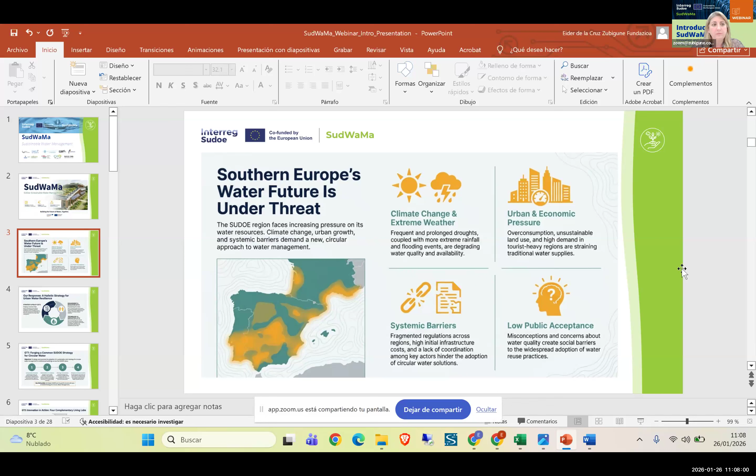The first pillar focuses on strategy and policy. The objective here is to develop a joint Sudoe strategy for circular water management, harmonizing regulations, public policy, and best practices across regions, which is important because we are working in the Sudoe territory. This work aims to support public authorities and decision makers in adopting coordinated and effective water management strategies. For the Sudoe program, this is one of the most important efforts, trying to implement this kind of strategy in the project.

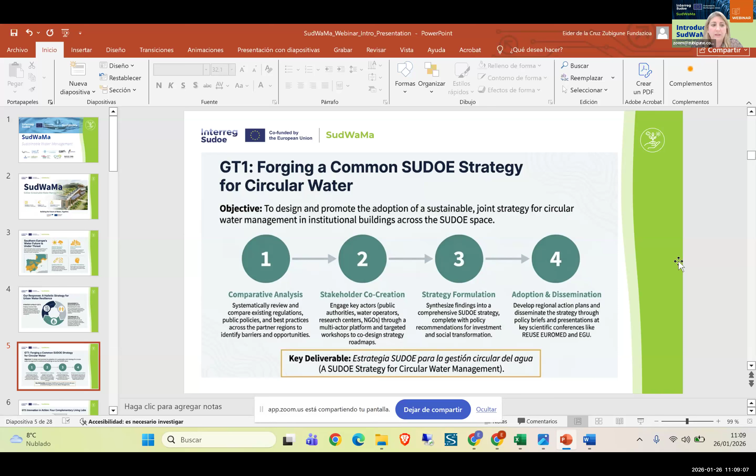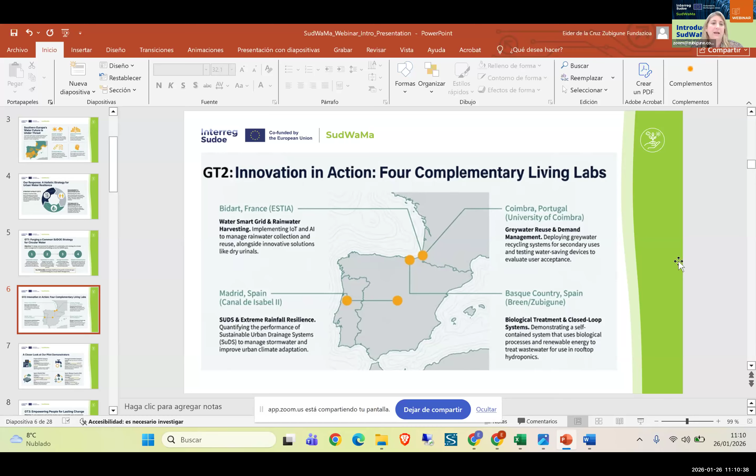So the idea is that each pilot works on different aspects, as we said, and afterwards there will be transnational topics that we can compare and apply after this analysis. So while we are working on these pilots, we will see what things are similar, different, what we can compare, and how we can work together on all this.

And the third pillar focuses on engagement and education. In that case, putting people at the center, SudWaMa places people at the center of the transition towards sustainable water management through water living labs, digital training modules, public awareness campaigns, and citizen science initiatives. The project empowers users, professionals, and institutions to participate in water saving practices and long-term behavioral change. So we think this is a very important aspect of our project as well.

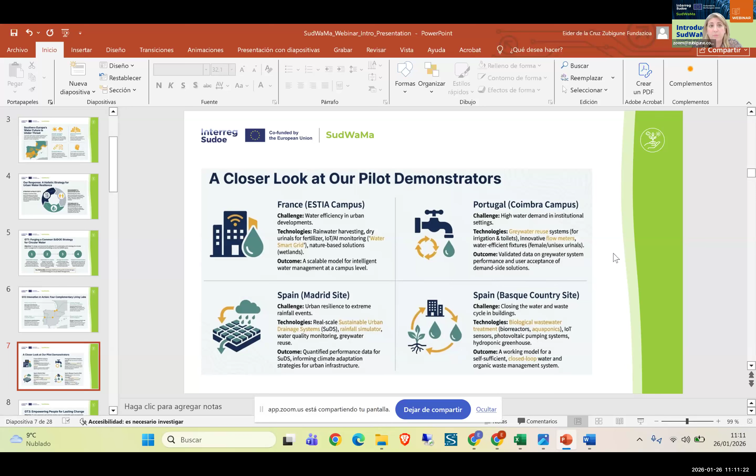SudWaMa is not only about testing solutions, but also about creating impact with this project. The project aims to deliver a replicable and scalable model that integrates technology, policy, and public engagement. Its legacy includes a joint Sudoe strategy for circular water management, validated pilot solutions, and strengthened institutional capacity to implement sustainable practices beyond the project's lifetime. I think that's maybe the more difficult aspect, but we will work on that.

Today's webinar is part of SudWaMa's dissemination and engagement activities, and it provides a platform to share innovative technological solutions and high-impact public strategies, and to foster dialogue between experts, institutions, and practitioners working in the field of water management. For the moment, with this introduction, I think this is enough information about the SudWaMa project. If you need more information, you can ask us or get in contact with us.

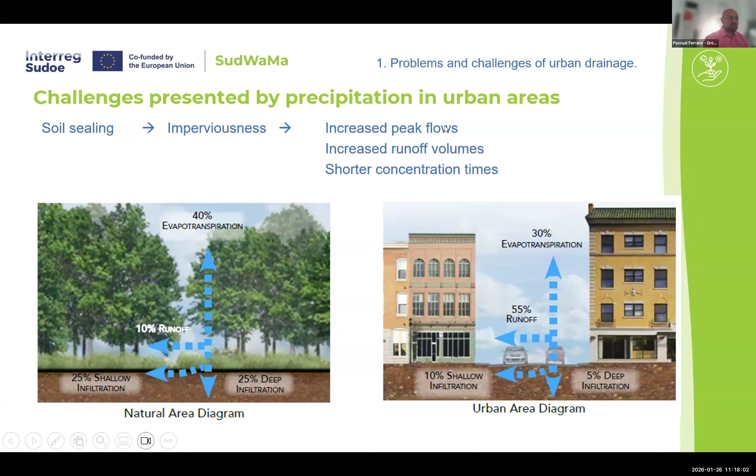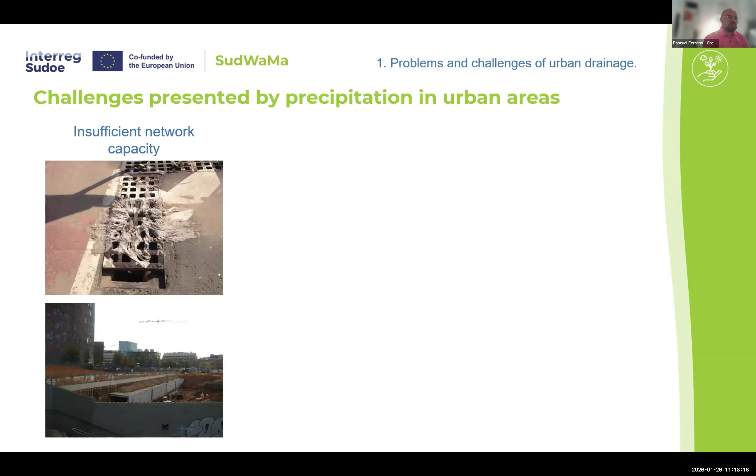So these are just some examples of the challenges that may bring to water management in urban areas. We can have insufficient network capacity, and in the long term this will make the network insufficient, and we will have to make it bigger.

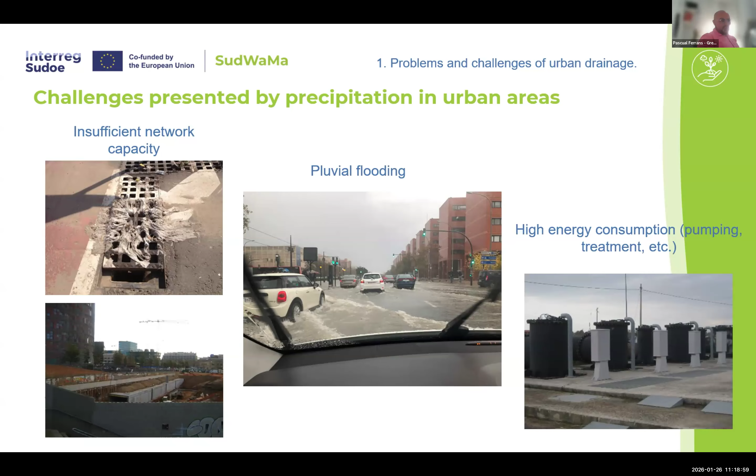Pluvial flooding, and every time more and more, these kind of pictures are more recurrent, due to different climate change scenarios that we can talk about a little bit more later in the presentation. This will also mean high energy consumption for pumping and treatment, and this of course will also mean high budgets for treating the water.

If we don't treat the water right in urban areas, I would like to make a quick example of, depending on how we treat water, how the sewer system works in our city, the impacts that urbanization may have.

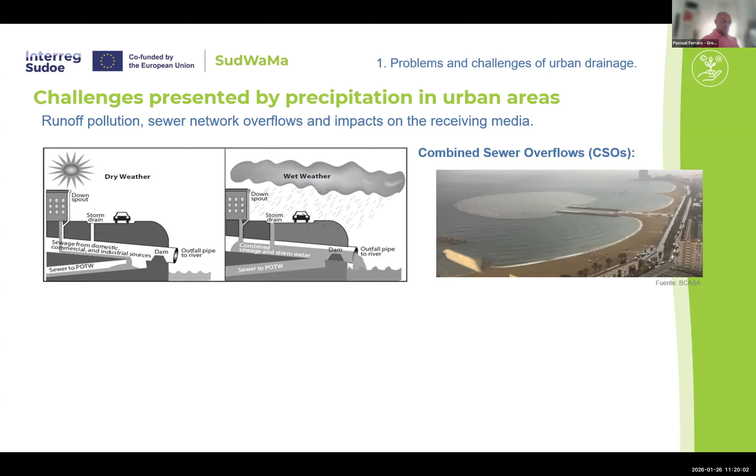In this first example, which is a combined sewer system, we can see on the left that in dry weather, what should happen is that the sewer, the pluvial and residual water from buildings, mainly gray and black water, will go to the treatment plant, and it shouldn't have much problem. The problem comes when we have wet weather. Our network doesn't have enough capacity to treat all the water, and this will generate what in the field is known as combined sewer overflow, CSOs, which may have big environmental consequences on the rivers, sea, and in general on the receiving water body.

And what happens if we have a separate storm sewer system? This is kind of different. Here on the right, you can see what happens when we're in dry weather, when there is no rain. What should happen is that all the residual water that comes from buildings and from human activities in general should go to the water treatment plants. But what happens when we have wet weather is that most of the water will go directly to the river or to the water body that is receiving water.

You may think that rainwater is not polluted, but this is definitely not right. On the right hand side you can see this is from an experiment that we performed in GVM, from an event in an urban area, and just by the color you can see how polluted rainwater may be. So this is also a big problem for the receiving media and water bodies.

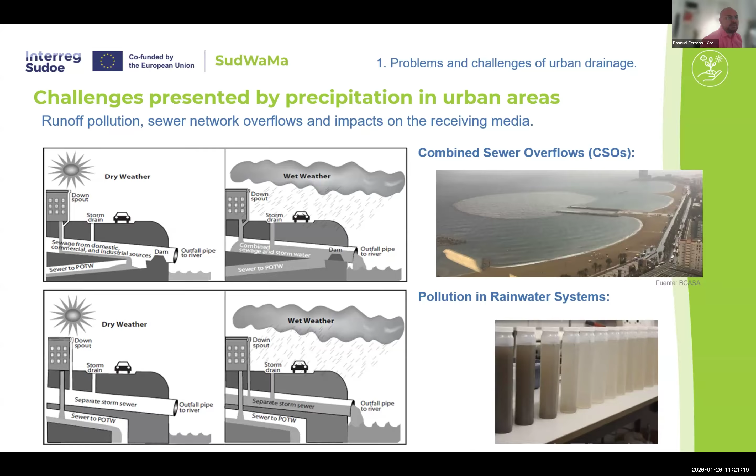Just some examples of some other challenges that rainwater may bring in cities. You can see here on the left some risks and some areas that should be used by citizens, like green areas. You can see a lot of erosion here, and here you can also see some floodings that mean the green areas that are supposed to be usable are not.

I want you to see this image because later on we'll see some comparison of how we believe this should be changed. We will also have a limited space for vegetation, and you can also see here how we can have safety risks for citizens, not only because of the flooding, but because of some uneven surfaces that may bring unsafety for citizens.

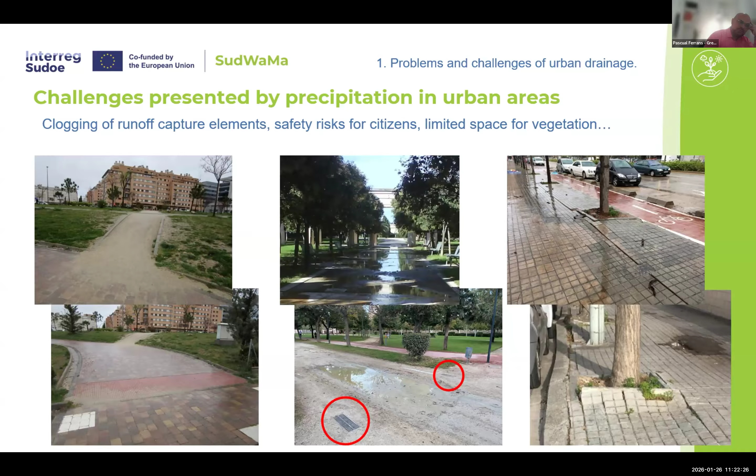Having this in mind, I would like to introduce now some of the concepts that we work on in GVM, which in the long term is called sponge cities, and how it should be accompanied by a paradigm shift in how we treat water in cities.

What we propose, what we think should happen, is that we should move forward to smart water sensitive cities, or sponge cities. I like this term because it's quite understandable that what we want to do is to absorb and use the water that comes into the city. The idea behind these concepts is that we mimic natural processes to deliver benefits without harming the environment. There are different pillars that integrate this idea, but in the long term, what we want to do is integrate urban development with water management.

Some of the ideas we want to change or introduce with this concept is that we treat cities as water supply catchments, to see water as a resource we can use and not as waste that we have to evacuate as quickly as possible, which is how I think it's done in most cities right now. Also, because of the green areas, we believe the city can provide ecosystem services and increase livability for the citizens, so you will have some added value with these solutions. And it's very important that cities have engaged communities and committed institutions to have this change of paradigm in how we treat water in cities.

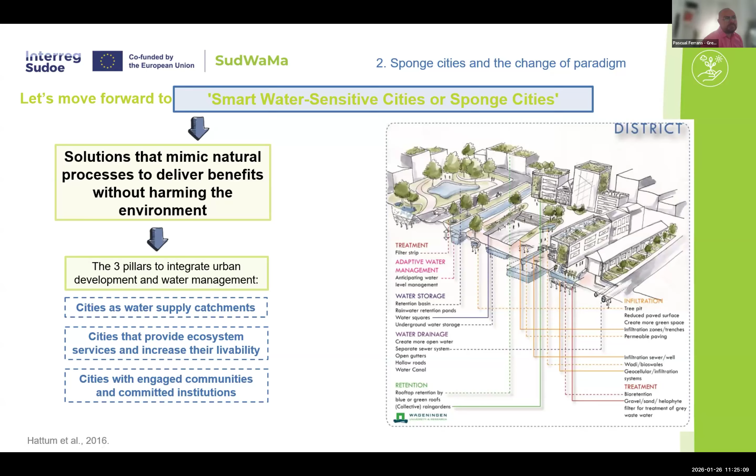So in order to change this paradigm, what we believe is a great and very powerful tool to do this is our SUDS, which is the acronym for Sustainable Urban Drainage Systems.

Usually what you may think is that SUDS have, of course, one of the main pillars being quantity - how these structures can manage the quantity and runoff production in terms of volumes and flows. But there are three other pillars equally important: these structures can also give us management of runoff pollution and water quality, and they create and maintain better urban environments, and enhance better natural environments in accordance with urban environments, having a mixture of both. So these are the four pillars we use to design these structures, and each is as important as the other.

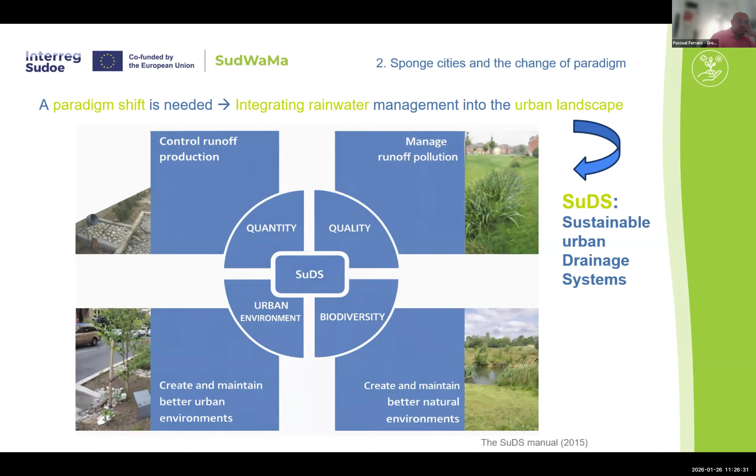There are different definitions of SUDS. Also there are different ways of calling it depending on the place in the world. They can be called low impact development, or other acronyms, but at the end we're talking about the same structures, or not the structures, but the idea of how to treat water.

So one of the definitions is that SUDS are an innovative stormwater management and urban planning strategy - and this is very important, the urban planning strategy - aimed at replicating and restoring pre-development hydrological processes. You remember the first diagram that we saw. The idea behind this is that they strategically integrate runoff control measures with urban landscapes.

So this is just one example. If you see this, you may believe that okay, this is a nice street - they have gardens, flowers, green areas. But what if these green areas also help us treat stormwater in a smart way in the city? So this is the idea behind it.

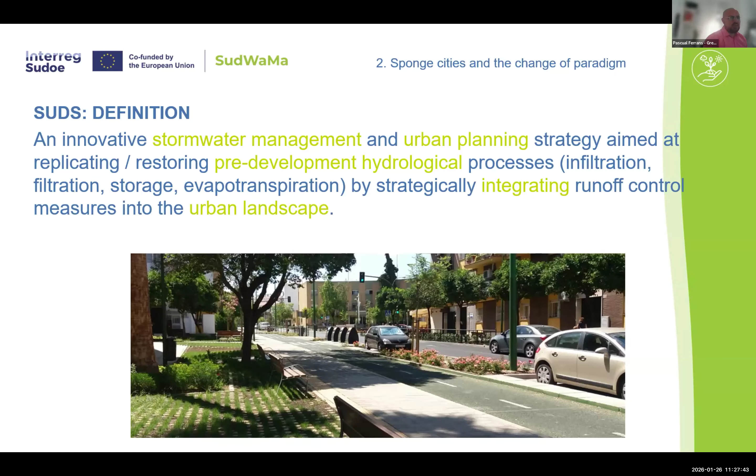So some key ideas about SUDS philosophy and how this works: we're aiming to protect existing water bodies by treating the quality of the runoff. We want to preserve natural drainage patterns - we're talking about pre-development hydrological conditions. We want to minimize and disconnect impervious surfaces. We will see some examples on how we can manage and achieve this.

This is also very important, and I think in terms of the project in general, one of the main potentials that SUDS have is that they consider rainwater harvesting and reuse strategies in order to have the circular economy concept. So that's another key goal of SUDS - we can see how they help us bring rainwater management to the source. We will see some examples later on.

And the key idea of these structures - we will see some examples in the next slide - but I want you to keep in mind that what we aim to do is have management trains with different interconnected structures, not just one structure. This potential will have higher impacts on the treatment that we do.

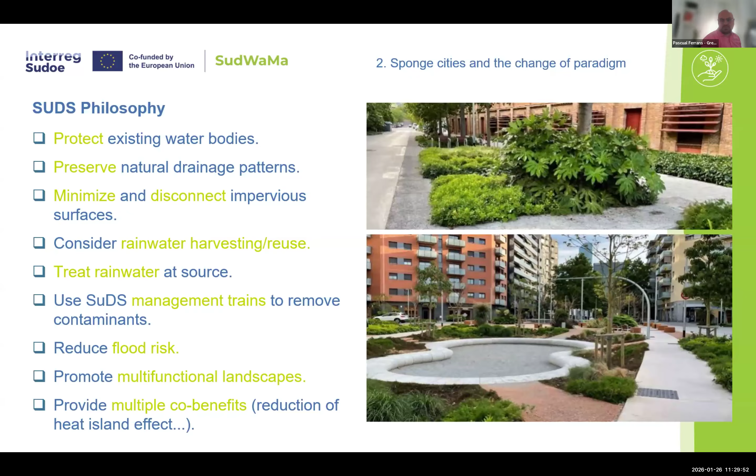Of course, we are aiming to reduce flood risk and have multifunctional landscapes with different purposes and multiple co-benefits. I don't want to go too deep into this concept, but just to mention some of them - the heat island effect, which is basically increased temperature in cities due to impervious areas, and these kinds of strategies will help us mitigate this kind of negative effect, not only on water but in different holistic areas.

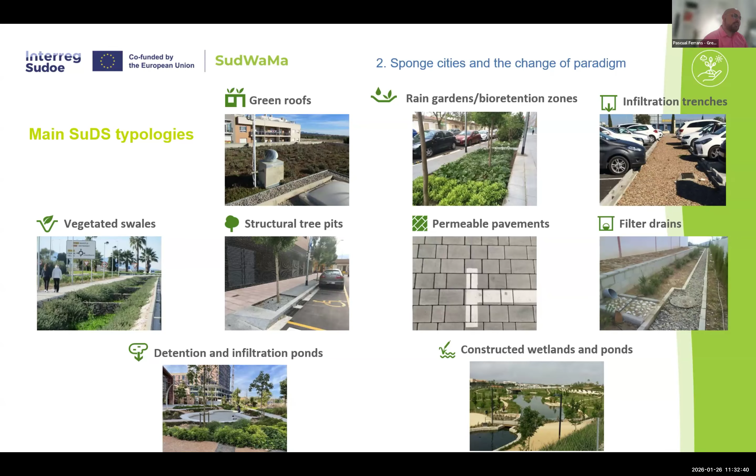As important as these are, there is also another concept. This kind of event that we are in right now is also very important, because as important as structural measures are, there are also non-structural measures such as educational programs, citizens' participation, and dissemination of experiences like this one right now. Legislation on planning, appropriate design, and also a very key factor in this kind of project, which is maintenance and prevention practices. So the idea is that not only building structures is necessary to achieve sustainable water management in cities, but these measures are also very necessary and included within the concept and definition of SUDs.

At the end, this is all included within a greater and bigger concept, which is nature-based solutions. So we're talking about actions to protect, sustainably manage, and restore natural or modified ecosystems. And this is also very important: we're also addressing social challenges and providing human well-being and biodiversity benefits.

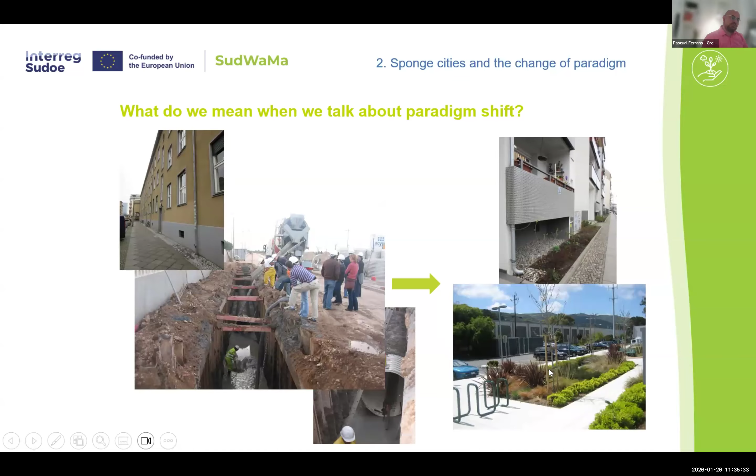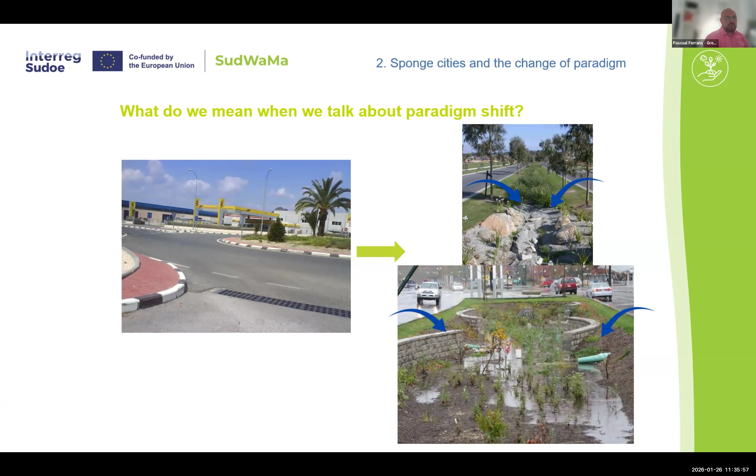Or what happens if we stop addressing problems with gray solutions, with underground big pipelines, and start to enhance superficial structures to treat water? We just finished last year a very nice project about a SUDs actuation in Catalonia, which was based on a roundabout. So what happens if we stop having these high roundabouts and start depressing the structures to have structures that treat water efficiently?

Or what happens—and this is also an example of big-scale structures we may have—if we stop having these big rain harvest deposits and start using superficial structures instead, which will also provide nice green areas for citizens to take advantage of? These structures are designed to be dry most of the time. So why don't we change this idea of how we treat water, using green superficial structures instead?

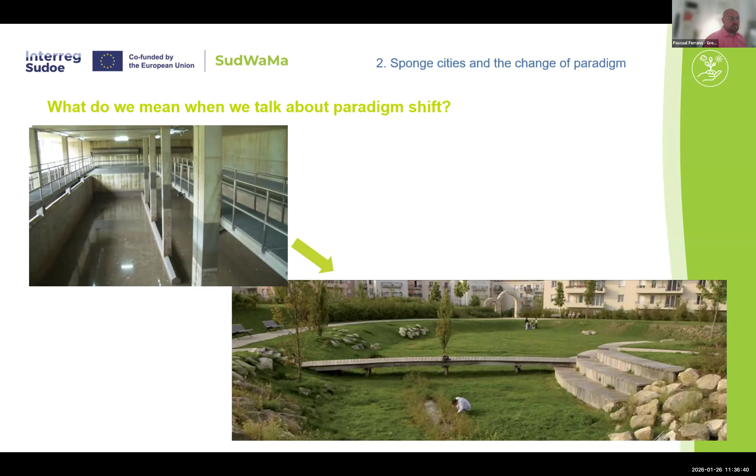This is also another key aspect. Normally how these projects work is that we have some budget and the water utilities company takes the decisions. But what we are talking about with this change of paradigm is: what happens if the university and academia are involved? What happens if green spaces are involved? What happens if energy, or even the community—which is also very important—is involved? We change how water projects are usually managed, and we start treating projects in a holistic way where different stakeholders are involved.

Okay, just the last aspect of the presentation, I wanted to make some success stories. So I want to start by giving you an idea with some success stories in Washington D.C.

This is in the United States of America, which is one of the countries that has been implementing these kinds of technologies, also probably the UK, Australia, and China. But I wanted to bring this as the first example of these structures, so you may see how they receive water from the roads and from different depressed green areas.

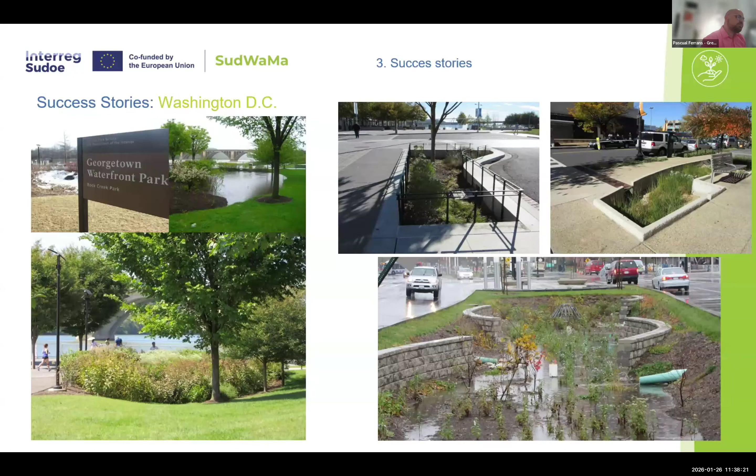But what I wanted to do is this. Usually you may think that this is some technology that is not used, at least in Spain right now, but that is not true. We have had some experience implementing this kind of project in Spain.

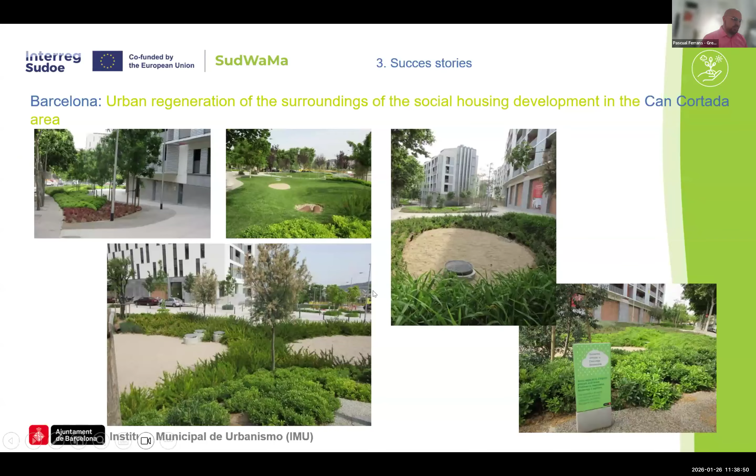So these are some examples, for example this is in Barcelona, in a social housing development. So we designed a holistic strategy to treat water with different green structures. This is the project, well conceived and finished.

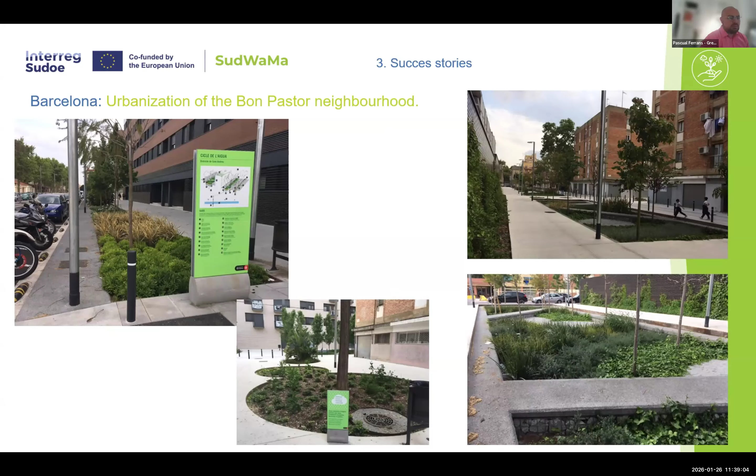Also in Barcelona, for treating water from different roads in the neighborhood of Bon Pastor. This is another good example of how these projects have been implemented in Spain.

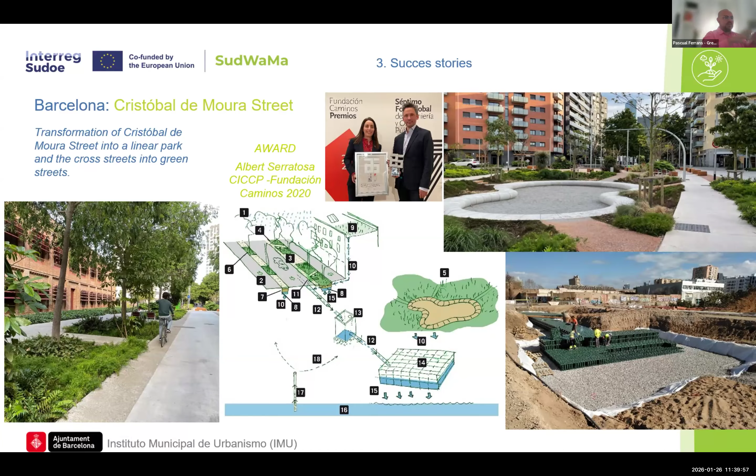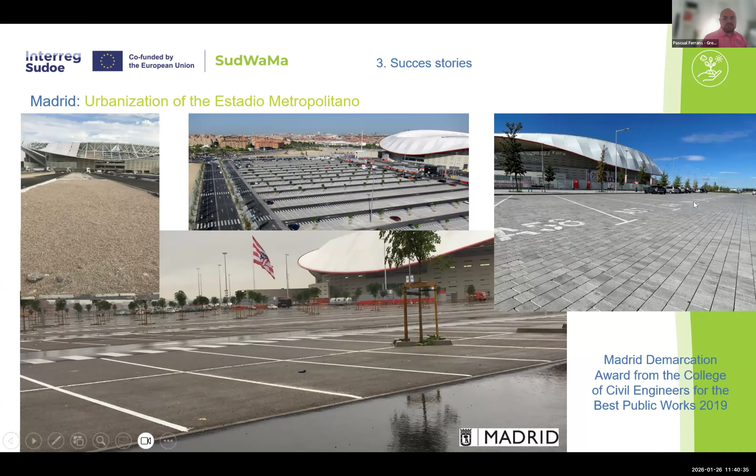Which was the installation of several hundreds of square meters of permeable pavement, which you can see here. If one day you have the opportunity to go to this stadium, you may see that this is already implemented and it's been working quite well for some time already.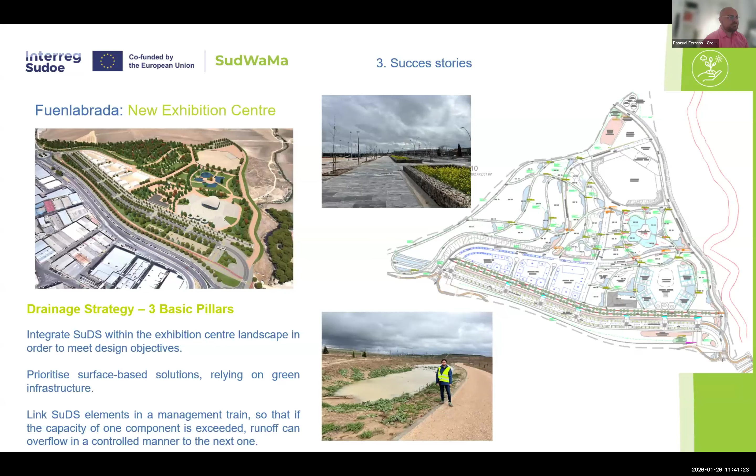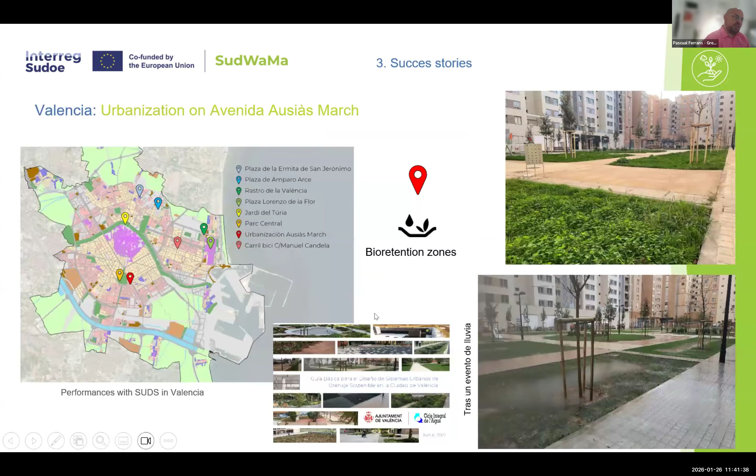And this is another example, in Valencia, where we are based, with different typologies and also with non-structural measures, which is the one you can see here, the guide for designing SUDs for Valencia. And this is also another example of how non-structural measures are important.

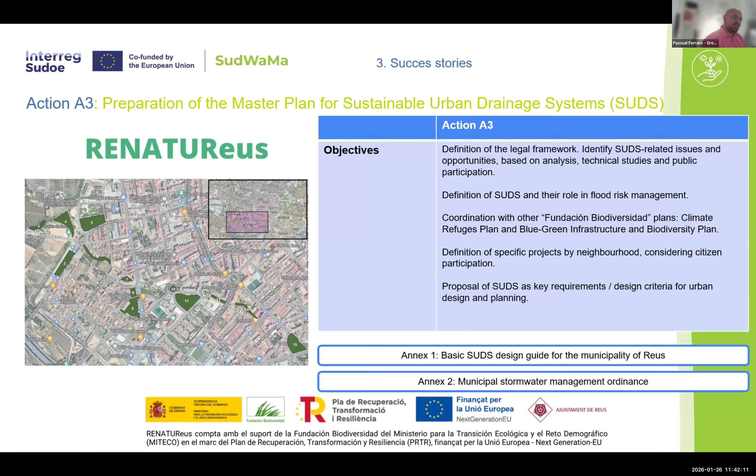We have also worked in Reus, not only on the roundabout project I told you about, but also on the preparation of the master plan for sustainable urban drainage systems, which is the step-by-step guide on how SUDs may be implemented and enhanced in the whole municipal area of Reus in Catalonia.

We did something similar in Pamplona. I don't know if I have some other examples. No, these two examples I wanted to bring just to give you some ideas on how the non-structural measures are also very important in implementing these kinds of structures.

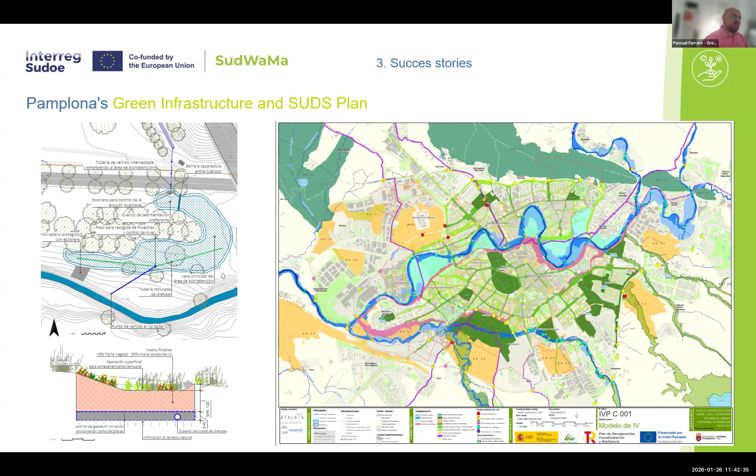So that was all. Just final thoughts about the presentation and how it should be conceived. SUDs can be implemented in a wide range of projects, and they are already well established in Spain. They should be addressed from a multidisciplinary and multi-criteria perspective, and this is very important for you to implement in a straightforward way.

It should be considered in the early stages of different projects, from planning and design. It's very important to have local design guidelines and the non-structural measures I was telling you about, to standardize the design of these kinds of structures.

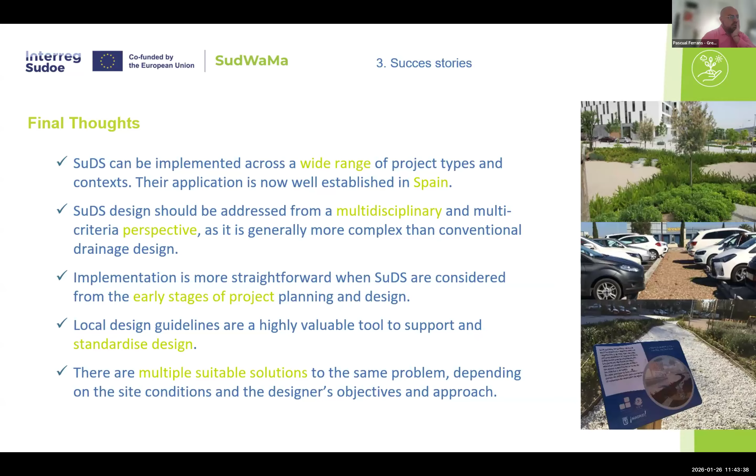And there are always multiple solutions even for the same problem. So the idea is to analyze each problem in a holistic way with different stakeholders, and to be able to address it in the most sustainable and efficient way. So I think that was all for me. Thank you very much for your attention.

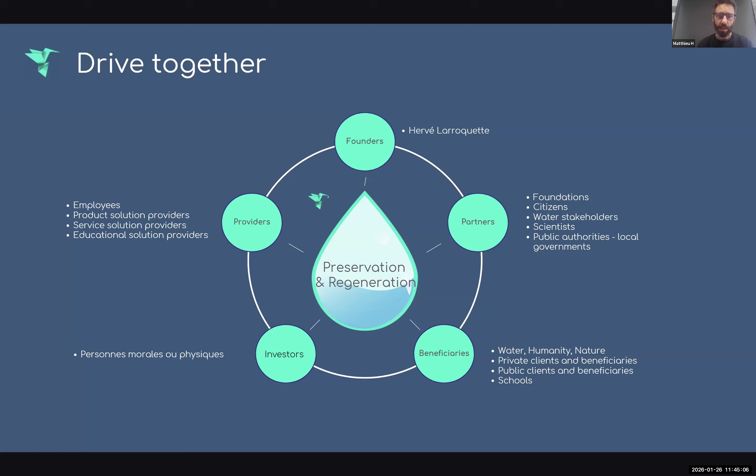Copo is a specific company as we are driven by purpose. Our purpose is to preserve our water, our communal water, and we are doing it by cooperation. How it works: first of all, we have five groups that together drive our communal company, and we do it by activating three levers.

The first lever is to propose the best water solutions. The second lever is to co-design and innovate, and the third lever is to bring together the voice of the water.

Briefly, I would like to show you some of the solutions we have as partners. They are in three categories. The first one is pedagogy, and we work with the Water Family, which is a French NGO, and Sator, which is a startup. Both of them help us propose pedagogy for children, for adults, from the operator and technician to the main leader and politicians. We have solutions in-person or digitally.

The second kind of solutions are services. One of our main partners is Arkiturria, a technical studying desk able to work as an architect to calculate and design the main solution for a hydro-performance building. The second one is L'Échappée Verte, which designs the fields and ground to generate and catch water.

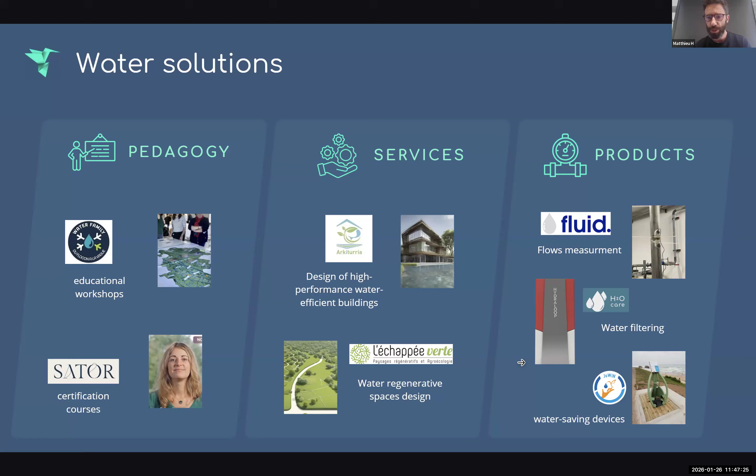The third group is what we call product or technical solutions. Fluidion is a solution of non-intrusive measurement to measure liquid flows. H2O Care and Hydroloop is a solution to catch gray waters and filter them to put them back, for example, into toilets or washing machines. And Juin is a technical solution that offers water preservation by using less water when washing your feet at the beach.

So just note that we aggregate several kinds of solutions, but I have a question for you: according to you, what is the very first step to preserve water? I'll let you a couple of seconds to think about this simple question. Not consuming it - for sure, that's a good solution. But I've got for you another solution, another way to think.

For us, the very first step to preserve water is mastering our understanding of water usages: who consumes what, for which uses, in what proportions, with what impact, on which territories, in what water context, and so on.

Lord Kelvin used to say we will manage only what we measure. But to be honest, today we work with a lot of data that is measured with many solutions in many frameworks. So this data is unclear, maybe not up to date, and not comparable. It's a real difficulty today to properly address water issues.

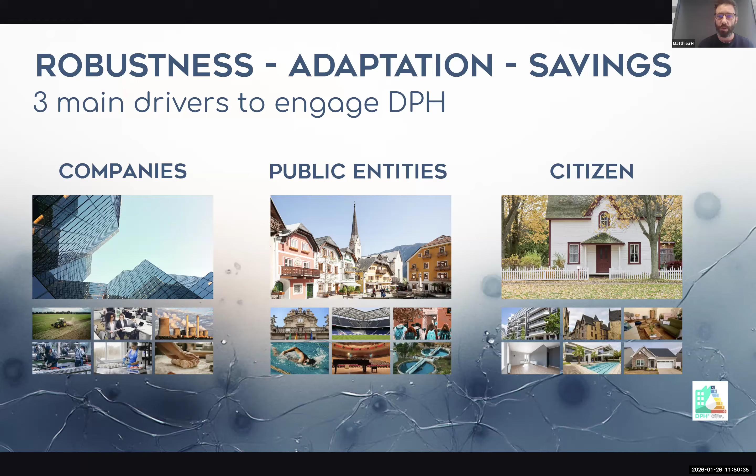We target everybody: companies, public entities, and citizens. For all of them, one issue is the budget of water. For companies, the main interest is to improve their robustness - any economic model is linked to water issues, price and availability - so we work with companies to improve their robustness to face these issues. For public entities, the topic is climate adaptation and service continuity, so we work with them to fix these issues.

How does it work? What are the main promises of the DPH? First, it offers a readable and comparable water score from A to G, so for a child, a grandmother, a grandfather, it's easy, thanks to our reports, to understand if a building is hydro-performant or not. The second big promise is to propose top priorities for the best action plan, and we target up to 40% of water saved for each DPH.

As a cooperative company, we have another promise: we would like to offer our data to politicians and public authorities.

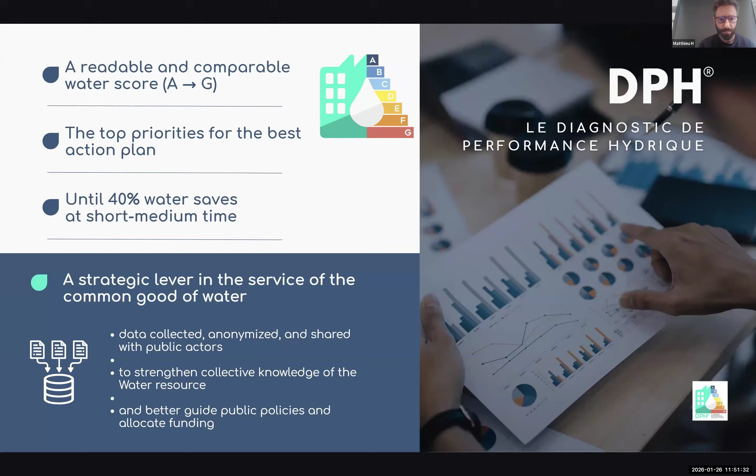How does it work? We have a global score from A to G, but this global score is calculated on 5 indexes. First of all, the quantitative index.

We are looking at the flows that are engaged in the field, in the building, and in each of their usages. What are the incoming flows, what are the volumes, and the quantity control processes. This index has its own notes, its own score.

Then we are looking at the qualitative index. We are looking at the outgoing flows of the field, the building, and the machines or devices, and whether in those flows we have some chemical or organic inputs, filters, and recycling technology and flows.

The third index is about the equipment and the usages. I always take the same example: in your shower, you can have a performance device to reduce the quantity of water you use. But if you stay 8, 10, or 12 minutes in your shower, even if your device is good, you have bad usage. So we are always looking at the device and the usage.

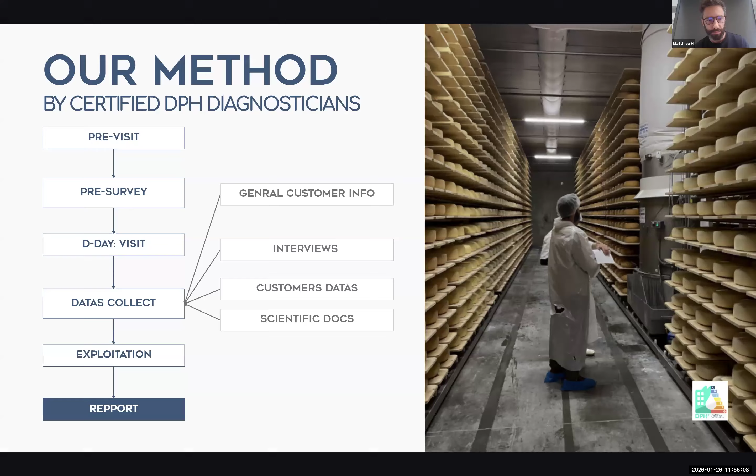Day by day, how it works: we do a pre-visit, especially if the building has a complex process. We send a pre-survey to our customer to collect a lot of data. We realize our audit. On the D-Day, we are always 2 expert engineers, hydrobiologists, and so on. We measure, we collect data, and we drive interviews with operators, technicians, and so on. Then we push all this data within our own algorithm and tools to create our report.

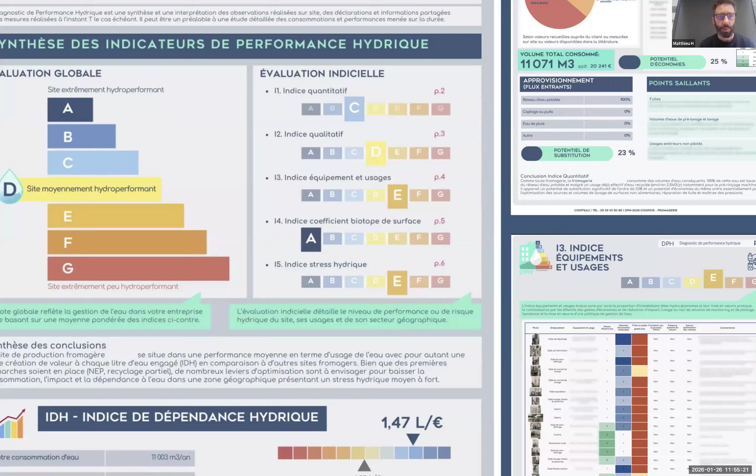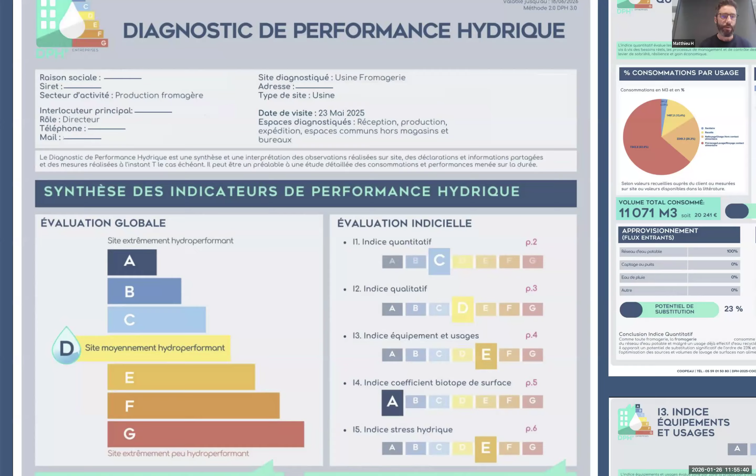This is an overview of one of our reports. This is the very first page. Maybe I can zoom in for you. As you can see, it's really easy to read and clear for everybody, because our target is not to deliver something complex for just some engineers. We would like to propose this kind of diagnostic to everybody, so it has to be very clear and simple to understand, to accelerate water preservation.

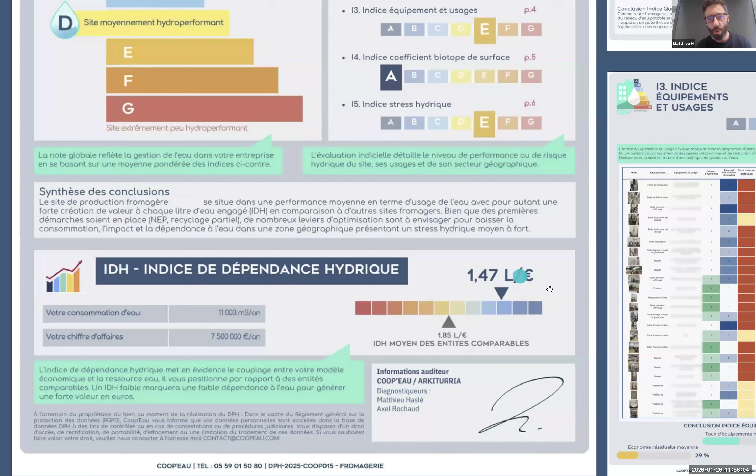So on the very first page, you have your global score, the 5 scores for the 5 indexes, our main conclusions, and an additional index that summarizes how many liters of water are engaged per €1 of turnover. We compare it to competitors, so the company can easily understand if they use more water than their competitors for the same euro.

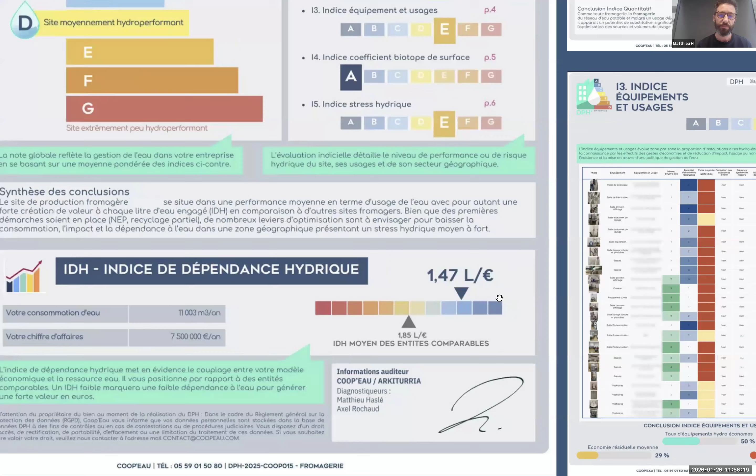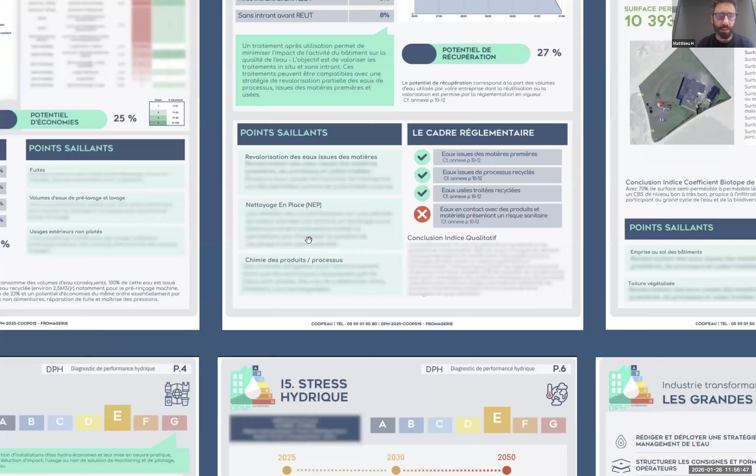Then you have 1 page per index: quantitative, qualitative, and so on. You can see the main figures about the water used by the customer - excuse me, this is in French - how far they can reduce their usage of water, what kind of recycling they can do, and so on. You can see the main points of their process, what can be improved, what is already well done by the company, and each time there is a conclusion for the index.

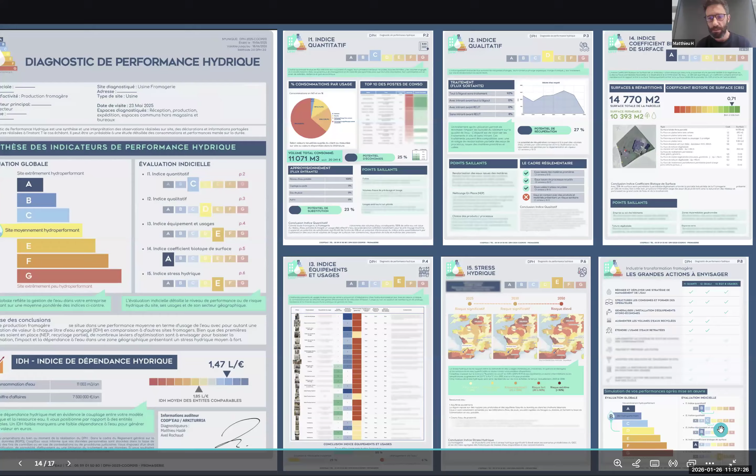So you can see here, as another view, the 5 indexes. We have theoretically 1 page with our conclusion, and on the bottom right you have a first macro action plan to drive our customer toward improvement. And there is a projection here, a simulation: if they put these actions in place, their score can go from one level to another.

So this is, let's say, the basic pack for the DPH, which has to be done within a constrained timing and a constrained budget. I insist on this again - our proposal is to let people access this kind of diagnostic.

We have some additional propositions. We can propose a detailed action plan - we work on maybe 30 or 40 action plans or actions usually that we propose to our customer, and they can participate with us to define the main action plans they want to put in front of our diagnostic.

We can propose to put some measurement devices in place. We can propose to go on technical feasibility studies. We are able to support them with on-site implementation, with the establishment of a water strategy, and with funding research.

What you have to understand is that we don't want to do all the diagnostic by ourselves. We are a small team, and as our target is to make this kind of diagnostic accessible to anybody, we are working as a network, and we are training some people out of our company to become diagnostic assessors.

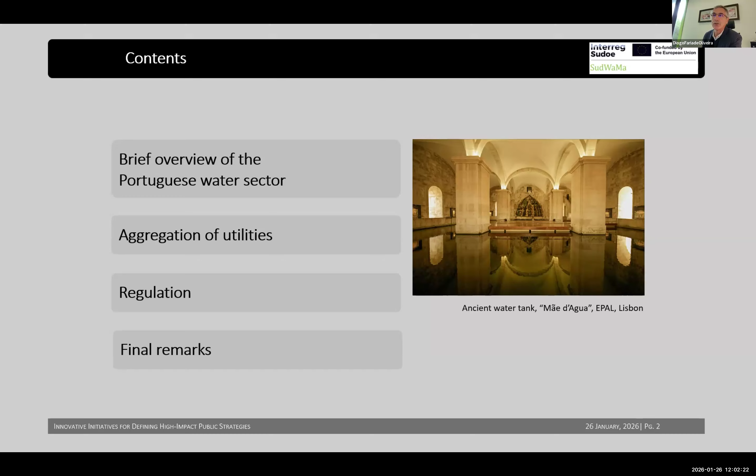Okay, I believe you are seeing the presentation. So this presentation is a little bit different, as innovative initiatives take long, they take a generation. So although we are calling it innovative, it is still high impact public strategies for the Portuguese water sector. We will briefly go through the Portuguese water sector, then talk about aggregation of utilities, regulation, and final remarks.

As you probably know, we entered the European Union in 1986. For the cohesion of social and economic standards to the average EU country, the European Union started supporting some sectors here in Portugal, such as transports and water and sanitation. So lots of grants were coming from the EU for us to build wastewater treatment plants, extend the network, and so on.

But here in Portugal, municipalities had the responsibility of doing it. So each municipality had its own priorities. Some did wastewater treatment plants, others extended the network, and so on. And our indicators were really poor. For example, in wastewater treatment we had only 28% coverage here in Portugal.

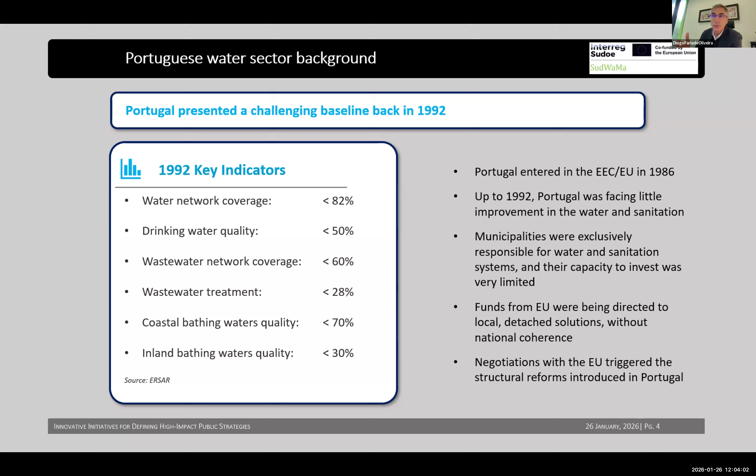What happened is that because municipalities were choosing their own investments, many wastewater treatment plants never even worked in their life, either because they were badly designed and constructed, or because there were no sewage connections, or just because the municipalities couldn't operate them. So the EU told us that we had to do some reforms, otherwise they would not put more grants into Portugal. This triggered the reforms that we had to undertake in this country.

These reforms started in 1993, and we made changes in laws. We did aggregation of utilities, restructured the tariffs, and rethought the sustainability of our water supply and sanitation. So in the laws, we made only small changes, but these changes were key to changing the entire sector.

One of the changes was to enable the central government to partner with the municipalities. Although this is a municipal responsibility, the government could do these partnerships with the municipalities, 100% public, but with the government participating with 51% in these partnerships, and the municipalities the other 49%. The second change was about private sector participation.

Here in Portugal, privatizing water and sanitation is absolutely forbidden. But there was this little change in the law that said that the private sector could enter into concessions with the municipality. So these two minor articles made all the difference for the changes here in Portugal.

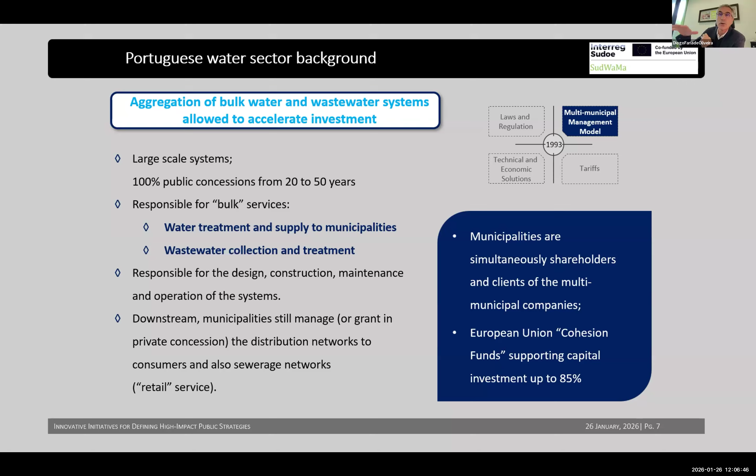They formed this public company, and this removed the responsibility of the municipalities for doing water and wastewater treatment plants. Downstream, at the distribution systems, which we call retail systems, municipalities could still choose to either do it alone or do it with the private sector.

In terms of tariff, we have full cost recovery in theory, and I'm going to explain it better. Tariffs include the bulk water tariff, what customers pay to these bulk water companies, these multi-municipal companies, and it includes the retail operation tariff, the price that municipalities retain for themselves to pay for water distribution.

Here in Portugal, tariffs are affordable everywhere. We pay in total for water and sanitation 2.32 euros per cubic meter. And still, if vulnerable groups, low-income families, and families that need support exist, they can go to a scheme of social tariffs. Municipalities can apply them or not, it's voluntary on their side, and we have social tariffs in 77% of the municipalities here in Portugal.

Then we made some changes in the technical solutions as well. We decided at the time to save groundwater for emergency and water scarcity periods, and we decided to make all water supply and sanitation from surface water.

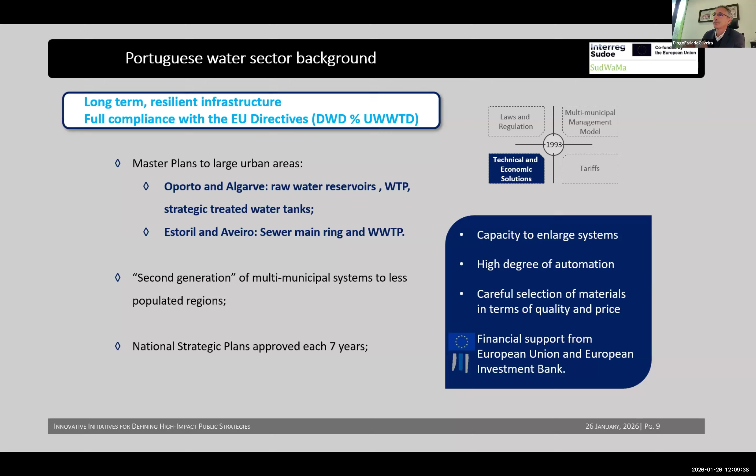So we started in large urban areas to have high impact, because that's where the population was centered. Then when we finished Porto, Algarve, and Lisbon, we went to the remaining country. So these were the reforms we were performing.

Also, along with the reforms, we have done national strategy plans for water and sanitation every 7 years, which we presented to the European Union. We explain what we have done in the previous 7 years and what we want to do in the next 7 years, and we agree with the EU and financial partners on what we need for the next 7 years.

So they were focused on different aspects. The first one focused on urban areas, the first multi-municipal systems. The second, between 2007 and 2013, focused on the second generation multi-municipal systems. The third focused on efficiency, and now we have a fourth one where we also include rainwater management. These plans are very important to align stakeholders on one hand and to attract funding for the country on the other, both from the EU, the European Investment Bank, and other financial partners.

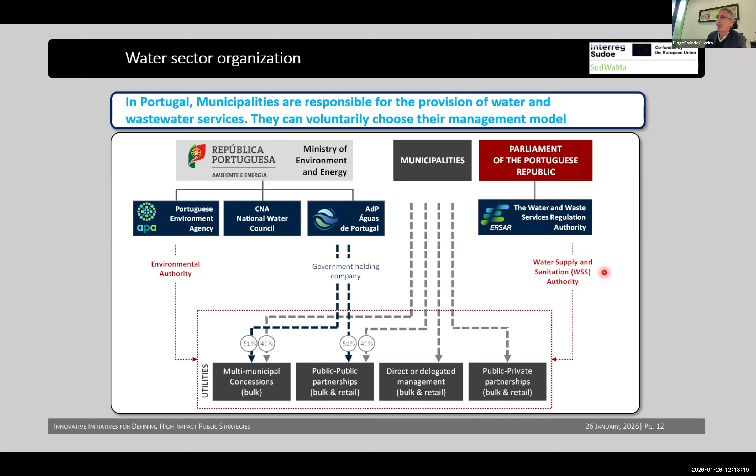This said, I'm going to go a little deeper on aggregation of utilities. As I told you, there is this government-owned company called Águas de Portugal. It owns 100% of EPAL, the company that distributes water in Lisbon and runs the bulk systems for the metropolitan area of Lisbon. Then they have these 12 multi-municipal systems throughout the country where they participate with 51% of the shares and the municipalities with the remaining 49%.

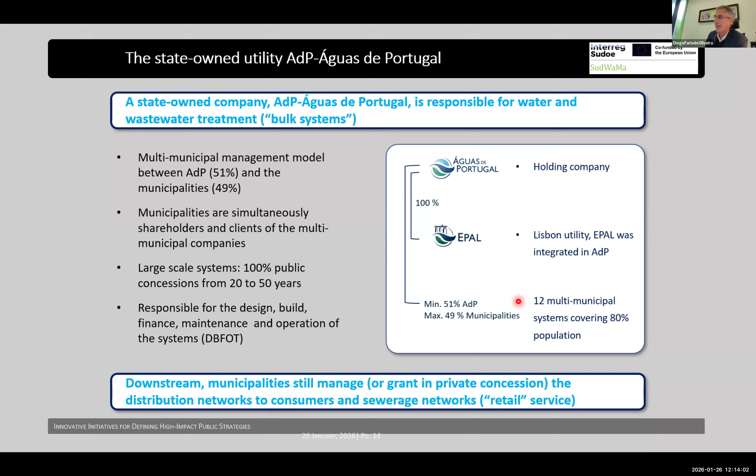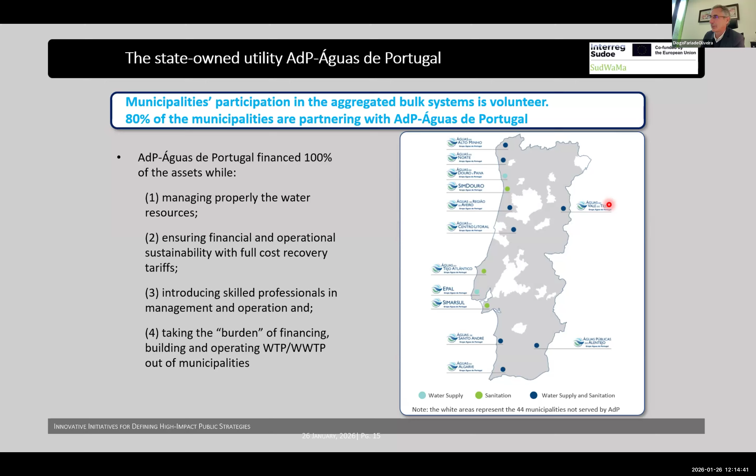It has some holes in it, and these holes represent the municipalities that are not partnering with Águas de Portugal.

On the distribution systems, the retail systems, there were also some aggregation, but very few: one in 1997, then one in 2009, one in 2015. All of a sudden, many municipalities start to aggregate their systems. Why? Because the government put a financial incentive for aggregation, giving grants to municipalities that aggregated their systems to gain regional scale. This is very recent, and it was possible through this incentive scheme made available for the municipalities.

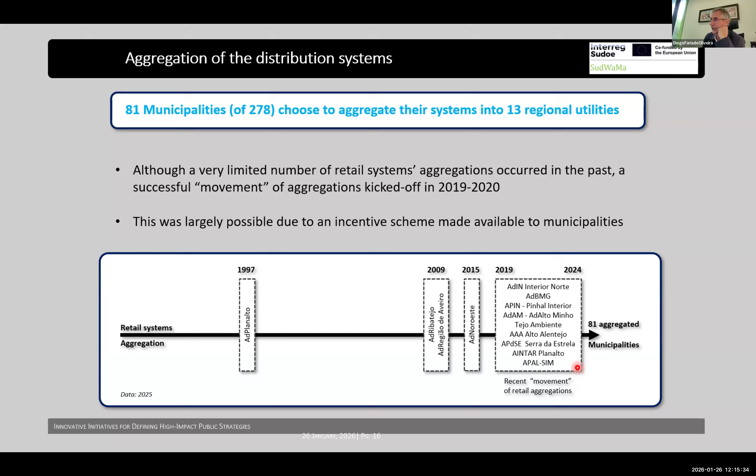About regulation: when we started these reforms, we created this national observatory. It was only an observatory for concessions, both the multi-municipal concessions and PPPs. Then it evolved, and the regulator here in Portugal evolved with the market. The more mature the market, the more mature the regulator. So from the observatory, we created an institution, again just for concessions. Then we added the quality of water to all utilities, public and private, and then we started regulating all utilities.

In 2009, from an institute it went into an independent authority under the parliament, not under the ministries. So by now we have a regulatory authority that responds to the parliament, with several regulatory functions. It is a very powerful regulator here in Portugal. It introduces confidence to the consumers, confidence to the investors, and transparency to everyone.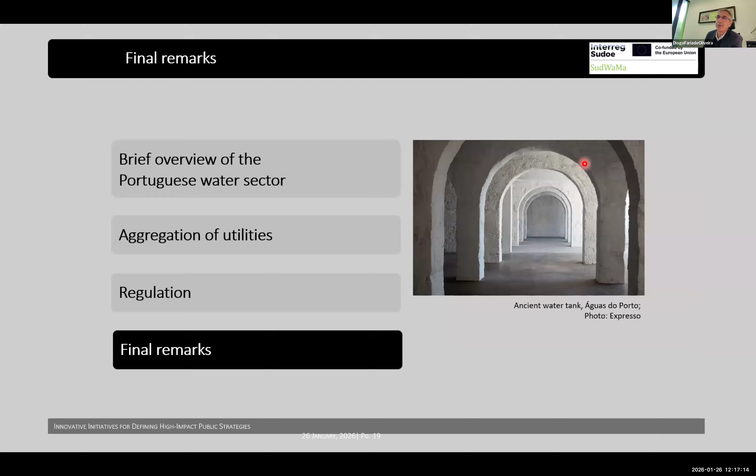So my final remarks: these public policies and reforms helped us go from drinking water safety of 50% in 1993, as I showed in the first slide, to universal safe drinking water quality. I have two daughters, and my daughters drink from water taps. So I know what I'm saying, and I give it to my daughters. It's absolutely safe all over the country. The network coverage is now universal. It only does not cover the farms and detached small and big farms, basically.

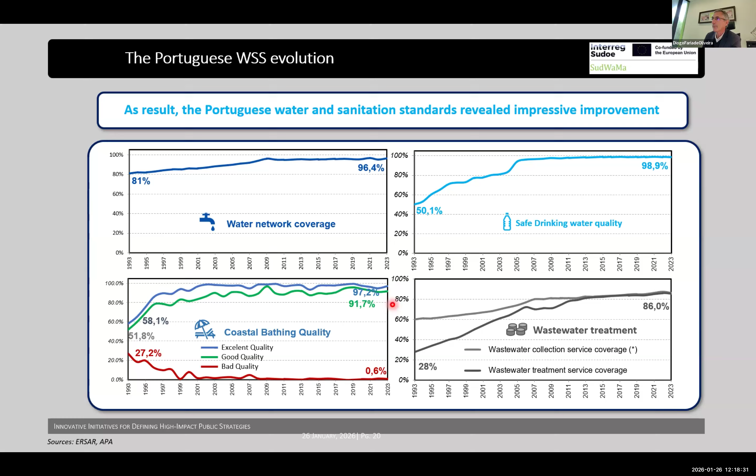With the wastewater treatment that increased from 28% to 86%, we were able to have this coastal bathing quality, which is very important for Portuguese tourism. You can bathe in all qualified beaches here in Portugal, both from the ocean and from the river as well. So this is it.

What can we learn from these reforms? First of all, it is important to introduce reforms when you cannot respond with quality services and quality products. These reforms introduced trustworthiness from the EU and from financial partners, and creditworthiness as well. This is how we were able to invest 40 billion euros. The strategy plans helped a lot to align all stakeholders and define what to do in every 7-year period.

The aggregation of bulk services allowed us to comply with the Urban Wastewater Treatment Directive and the Drinking Water Directive, while at the same time removing the burden of heavy investment from the municipalities. The aggregation of retail services helps create scale and more financially sustainable utilities. And the strong regulator introduces transparency, which is very good for confidence in the market.